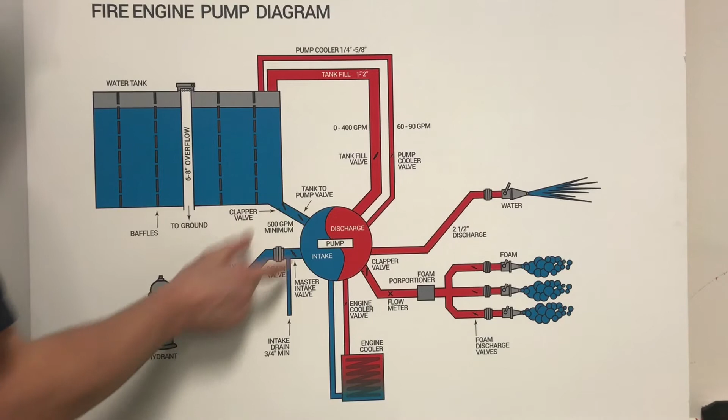Moving around to the discharge side. First thing off of our discharge is this tank fill line. And that tank fill line can be anywhere from 1 inch to 2 inches in diameter. Tank fill just takes water off the discharge side of the pump, comes up, and dumps it right back into the tank. So that tank fill line can circulate anywhere from 0 to 400 gallons a minute.

I've seen up to 450. It depends on your pump pressure, how high your discharge pressure is. But that's quite a bit of water. It also allows us to recirculate water, right? If we're not flowing water out of nozzles, we can just sit there and circulate water and keep our pump cool.

Good to know that tank fill on our poly tanks, you don't want to fill your tank at over 100 PSI. It's written on the side of almost all the tanks. So we don't want to have this wide open if our pump pressure is way up in the 180 range. Just something to keep in mind.

Moving over, we have our pump cooler, also called a recirc line. It comes off the discharge side, just like the tank fill, and dumps right back into the tank. That's going to be a smaller line, maybe 1/4 inch to 5/8 of an inch. Its purpose is to circulate 60 to 90 gallons a minute, just enough water to keep our pump cool if we're not actively flowing.

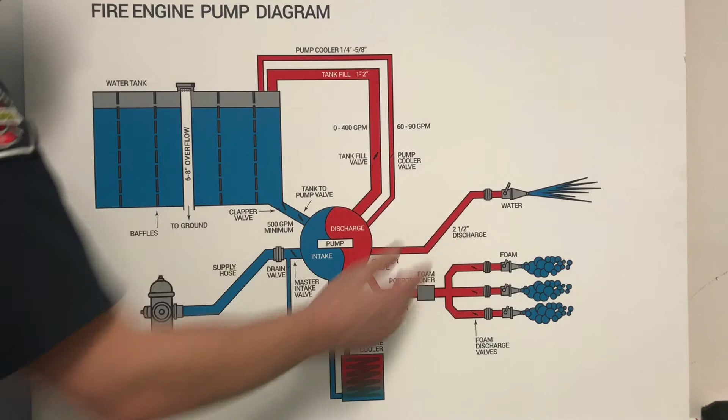Moving down, you see a 2.5 discharge down here. Now that's not just a 2.5 discharge - that drawing just represents all the discharges, except the foam ones. So off the discharge side, we have 1.5 inch discharges, 4-inch, deck guns, hose reels. That just kind of represents our standard discharge.

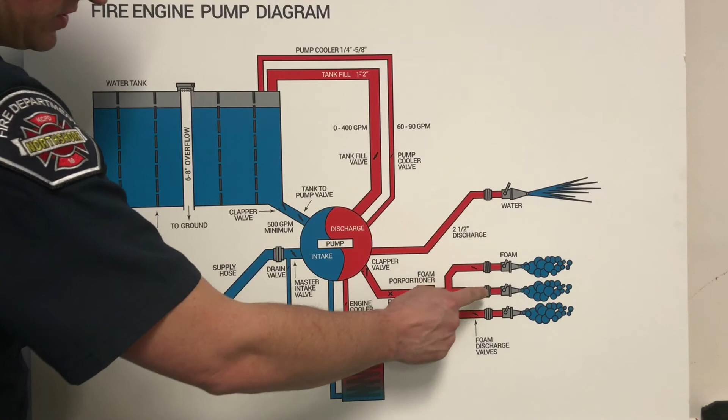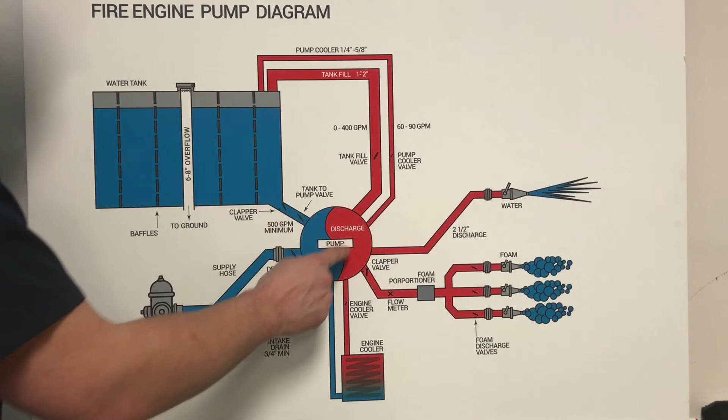Moving down from there, off the discharge side of the pump, we have foam discharges. If you have an onboard foam system, they're very unique in how they're plumbed. You notice in this drawing there's 3 foam discharges, and they're all fed off of one pipe. That pipe has a foam proportioner, which squirts the foam in, a flow meter, which tells the proportioner how much foam to squirt in for how much water we're flowing, and a clapper valve. The clapper valve is going to prevent water from coming back into that discharge manifold and contaminating everything else with foam, like our tank and our other discharges.

Good to know - in this drawing, if we have 3 foam discharges, how much water can we get out of those? Can I hook a 2.5 up to each one at 350 GPM? Well, depending on your rig, probably not. Most of them are fed by a 2.5 or 3-inch pipe, so you're going to max out at about 750 gallons a minute. It's good to know for your rig what the specification is for your foam manifold - how many foam discharges can I flow at once, and at what GPM?

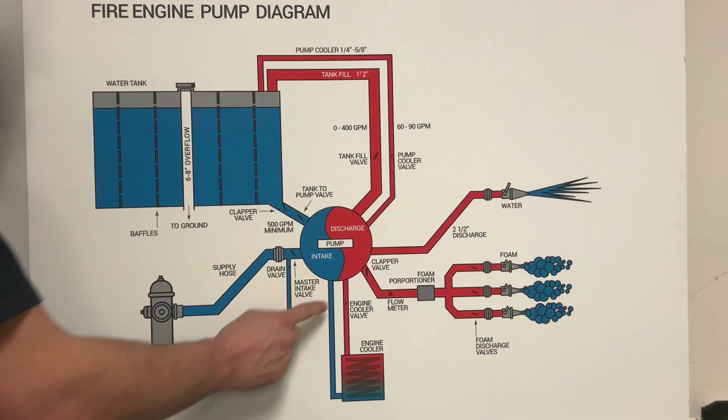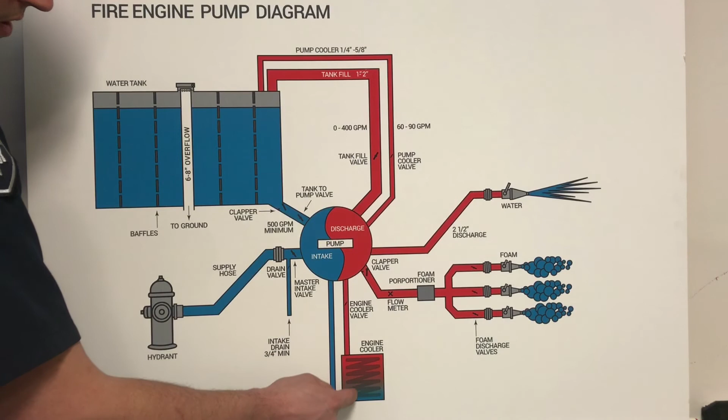Moving down, we have our engine cooler valve. This is going to run a pipe up into the radiator. It's a heat exchanger that allows us to run pump water through the radiator and come back into the intake of the pump. So if it's the middle of summer or the engine's working hard and we notice the coolant temperature is getting too hot, the engine cooler can be engaged and circulate cool pump water through the radiator, keeping our engine cool.

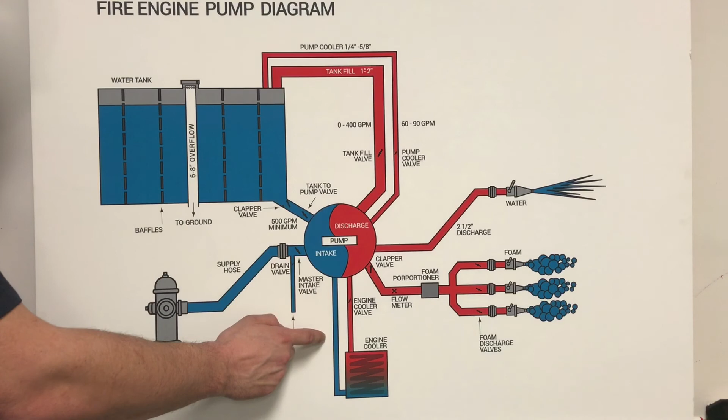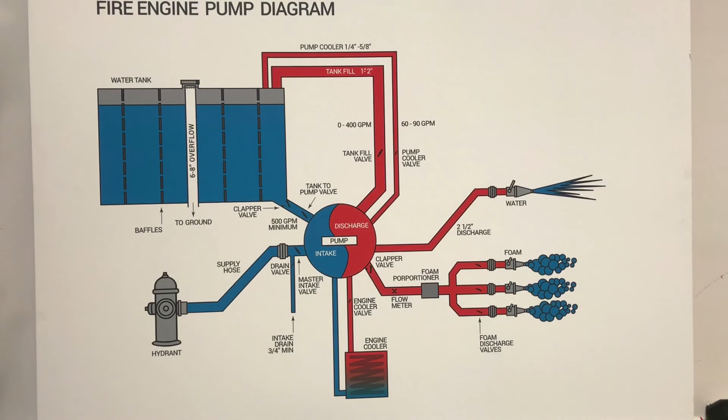As you can see, there's a lot going on behind the pump panel. A good functional understanding of the mechanics of what's happening is going to help you develop as a good engineer. Along with this video, there's a worksheet that's going to come with it - there'll be a series of questions just to get you familiar with your apparatus: tank size, tank to pump flow rate, some questions on foam systems. Sit down with your crew, take a few minutes, try to generate some conversation, and just learn a little bit about your apparatus.